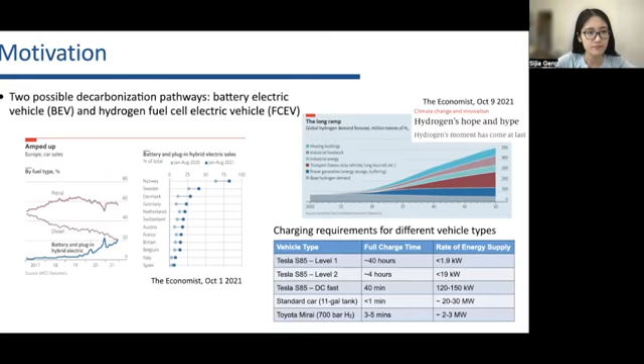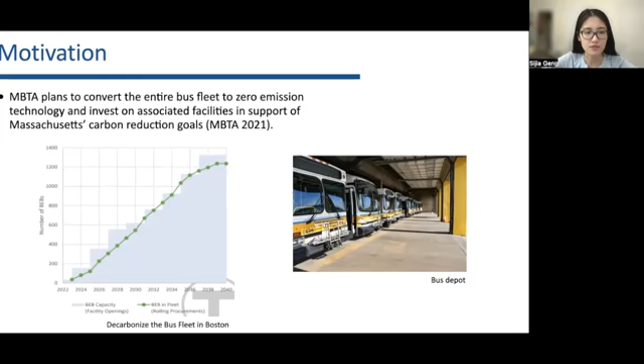Zooming into the local area, MBTA, the local transportation authority in Boston area, has set a plan to convert the entire bus fleet to zero-emission technology and invest in associated facilities to reduce carbon emission. In this work, we will utilize realistic data from MBTA to analyze the potential and impacts of using electric bus fleets to cover transportation demand.

Both battery electric and hydrogen fuel cell electric vehicles will have large impacts on local energy distribution systems. Our goal is to investigate the impacts of fast charging stations and hydrogen refueling stations on local electricity distribution systems. We aim to fill in the gap in analyzing the impacts of renewables and on-site local hydrogen production on optimal system design and operation.

The novelty of our work is that we designed an optimization tool for co-planning the infrastructure at the depot and the electric vehicle fleet. The optimization tool is able to handle large-scale realistic transportation systems.

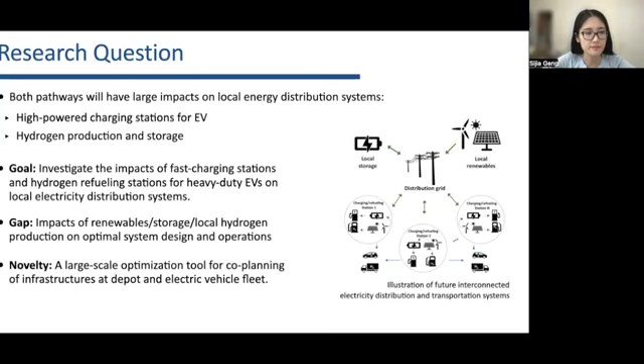The left figure gives an illustration of the overall composition of infrastructures at the depot. The upper part represents the electrical system of the depot. It is composed of various distributed energy resources, including wind turbines, solar panels, and battery storage. A connection to the grid is also included as a backup option when the local renewable generation is insufficient.

The lower part shows various hydrogen delivery, production, and refueling components, which are modeled to represent the infrastructure supporting hydrogen fuel cell EVs. Hydrogen can be generated through electrolyzing water, which is an entirely carbon-free method. Otherwise, hydrogen can be generated through a reforming process, which uses natural gas as the feedstock. Hydrogen delivery via truck is also an option.

The produced or delivered hydrogen is then stored in a hydrogen tank, which will then be compressed to a high-pressure storage buffer before being dispensed to the vehicle. The electricity usage from these various hydrogen processing devices interconnects the electrical system with the hydrogen system at the depot.

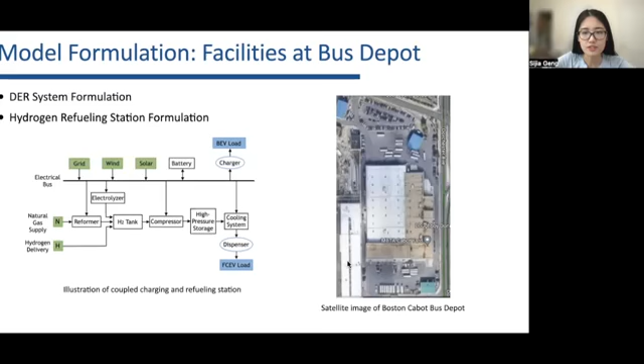The right figure shows a satellite image of the Boston Cabot Bus Depot. The total roof area will enforce a certain limit on solar panel installation capacity.

The key challenge of our planning problem is that realistic transportation systems have complex and large-scale trip schedules. Conventional formulation tracks the charging and operation for each vehicle and charger. This is intractable to scale up for the full number of trip schedules and considering multiple vehicle and charger types. In this work, we propose an integer clustering formulation. We group vehicles and chargers by type and manage charging and energy at the group level.

This figure illustrates the idea. We consider 3 vehicle types, each of which has multiple buses. We track the total energy stored in all vehicles at the depot that are of the same type. When a vehicle leaves the depot to start a trip, sufficient energy needs to be carried in that specific vehicle.

Similarly, we only manage the chargers at the group level instead of managing the individual charging. Through manipulating constraints on the energy carried in the bus on trip, the integer clustering formulation can give rise to both an upper bound and a lower bound on the true solution for the individualized formulation.

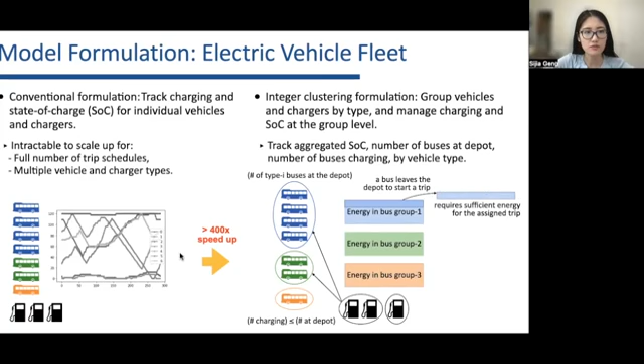We work with real fleet demand data from the MBTA transit schedule. The schedules are complex and represent timescale information that should be included in our investment planning problem. We select 8 representative days to capture the season and day types, differentiating the weekdays from the weekend.

The route distances are calculated from shapefiles, and we refer to a block as the collection of individual trips that start and end at the depot. In the planning problem, every block needs to be covered by 1 vehicle. Decisions will then be made about how many vehicles and chargers and associated infrastructure need to be built.

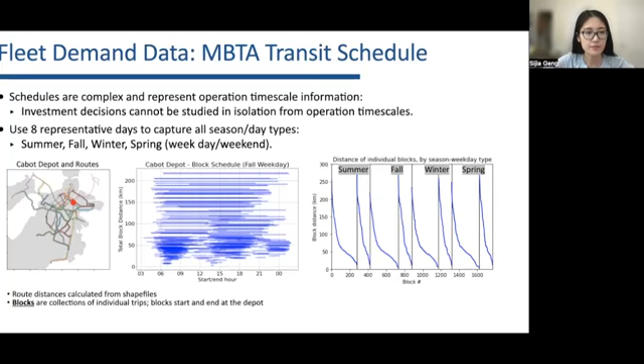We adopt a time of use electricity tariff based on the new ISO New England wholesale market price signal. Furthermore, a monthly demand charge structure is enforced to penalize the peak demand, and a higher price is set for summer months. For hydrogen delivery via truck, a fuel cost of $10 per kilogram is assumed to reflect the status quo.

In the case study, we investigate 3 types of battery EVs from the Proterra ZX5 product line, and 1 type of hydrogen fuel cell EV from the New Flyer Xcelsior. 3 DC fast chargers with different charging levels are considered in the study. Note that the level 4 DC fast charger is very cheap compared to level 5 and only slightly more expensive than level 3. The hydrogen refueling nozzle is also much cheaper than DC fast chargers, but has a much higher power rating.

Based on the optimization results, to support the given transportation demands, we need to invest in 3 types of battery EVs of various quantities and 9 level 4 DC fast chargers. Currently, the high cost of hydrogen delivery and on-site production prevents the hydrogen fuel cell bus from being deployed. However, among the various choices of distributed energy resources, solar photovoltaic is chosen to be built up to the capacity of the site.

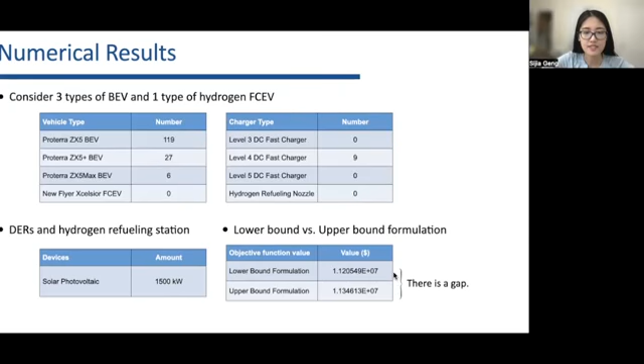Recall that our integer clustering formulation gives rise to both an upper bound and a lower bound. In this example, there's indeed a gap between the 2, suggesting an approximation error to the individualized formulation.

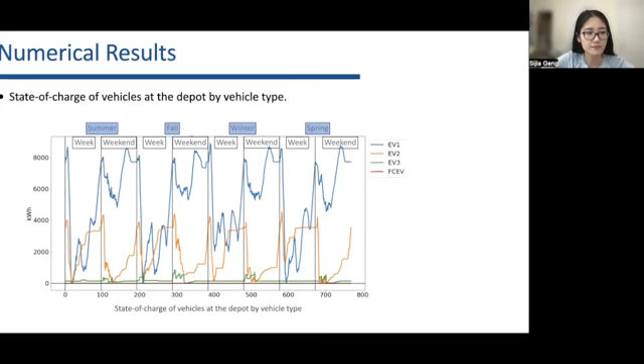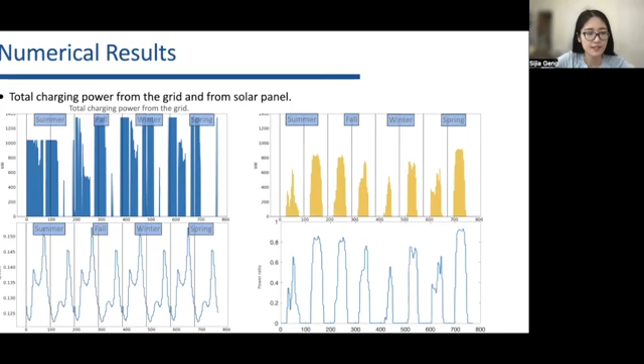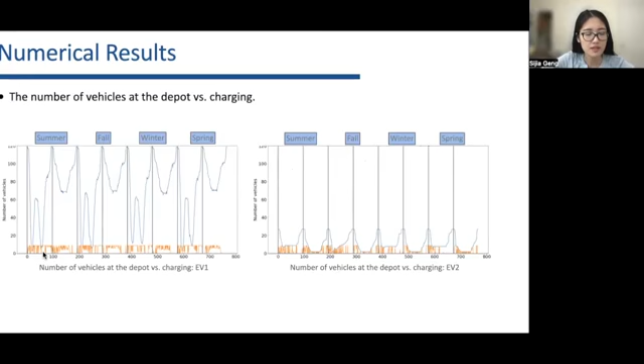These two figures show the number of vehicles at the depot versus those actively being charged. We can see that most of the time, only a small portion of the vehicles are being charged, which explains the relatively small number of chargers being built. This reflects the fact that we are charging the vehicles smartly by optimally switching charging between vehicles.

In summary, this talk makes a novel attempt to represent the complex dynamics between energy systems and vehicle demands in future transportation systems. We provide realistic insights into the evolution of future interconnected electricity, hydrogen, and transportation systems.

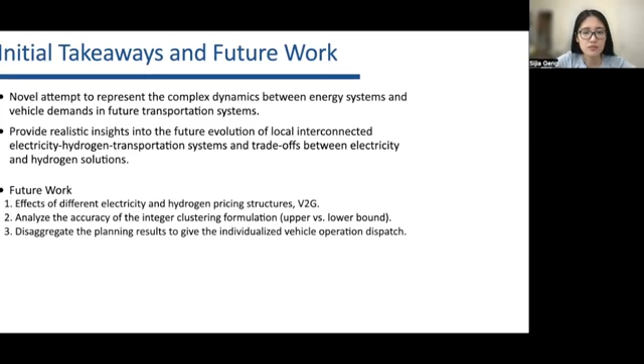For future work, we plan to look into the effects of different electricity and hydrogen pricing structures on the planning results. From the analytic perspective, we will analyze the accuracy of the integer clustering formulation. The planning results will be disaggregated to give the individualized vehicle operation dispatch. And this concludes my talk.